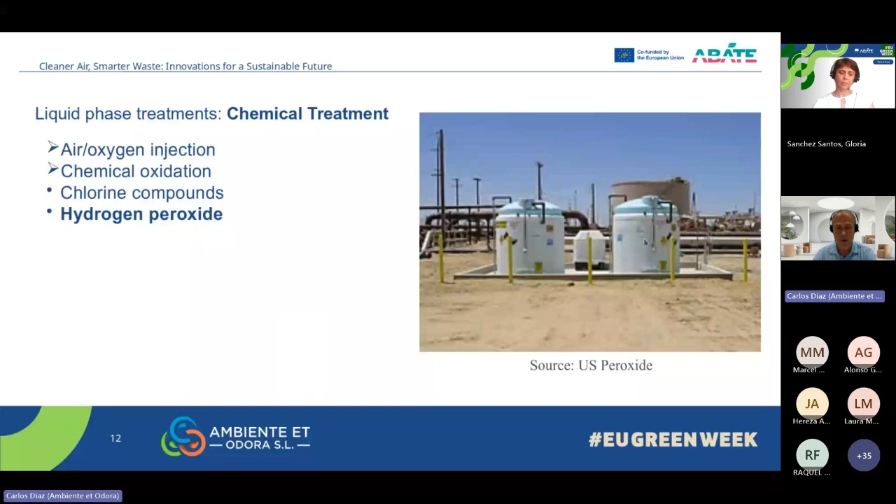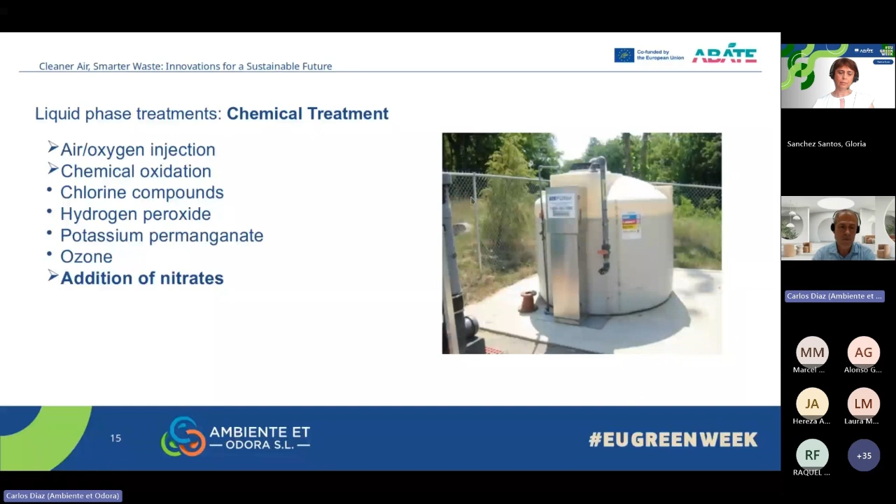Then you have chemical oxidations - for example, using chlorine compounds, you oxidize those volatile organic compounds, or hydrogen peroxide, potassium permanganate, ozone, which is typical. I try to include the sources when I get the pictures. Nitrates - this one I didn't include the source. Iron salts - this is from Webster. Most of them are good friends, I know most of them. And the pH adjustment - depending on the pH in a liquid, you may have a higher or lower emission of hydrogen sulfide, which is one of the typical indicators, not the only one.

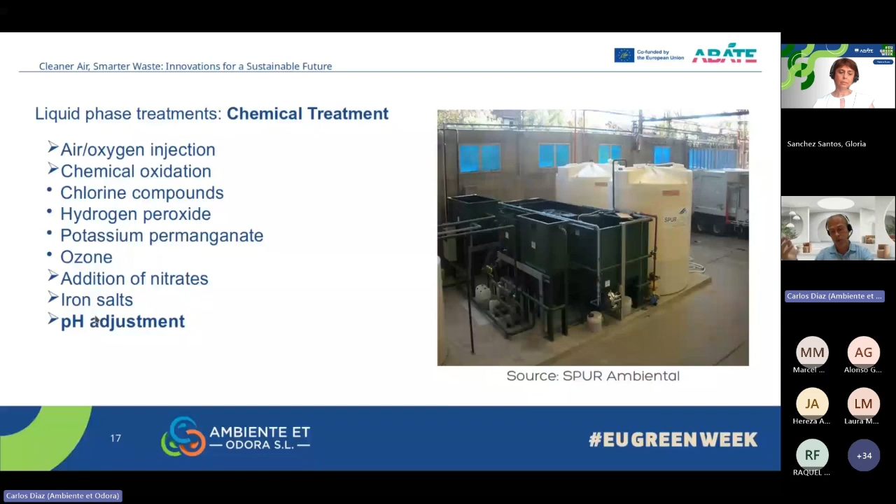Then in liquid phase treatments, you have the biological treatment, and there are three approaches. The first one is the recirculation of activated sludge. So you are in a wastewater treatment plant, and then you can recirculate the activated sludge and put it at the head of the system, at the beginning of the system, because there are nitrified effluents - remember, we use nitrates there.

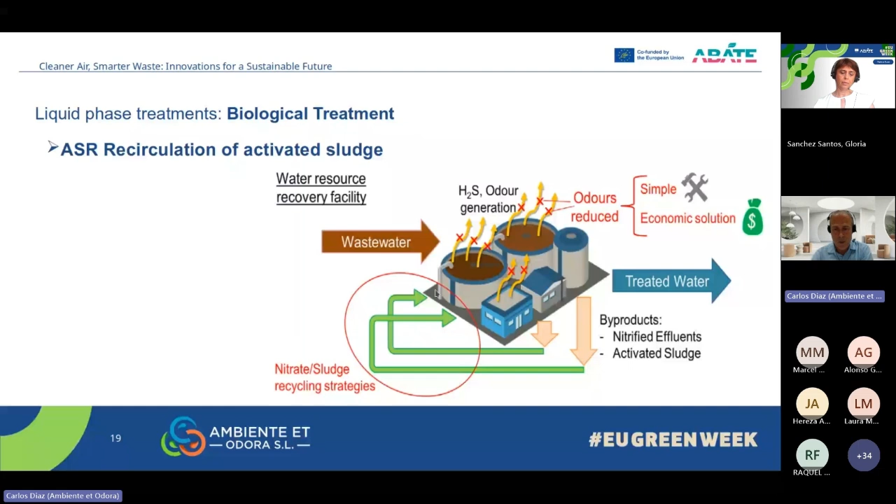Those will help improve odor emission in your wastewater treatment plant, in case you have it. Another approach is oxidized ammonium recirculation, where you get oxidized ammonium from, for example, centrate nitrification, or from the nitrification part, and then introduce it in the inlet.

So this is a very cheap way to reduce odor emission if you have a wastewater treatment plant with problems of odor complaints. It's not here, but sometimes people use enzymes for biological treatment. I didn't include it here because the publications I have found are not that positive.

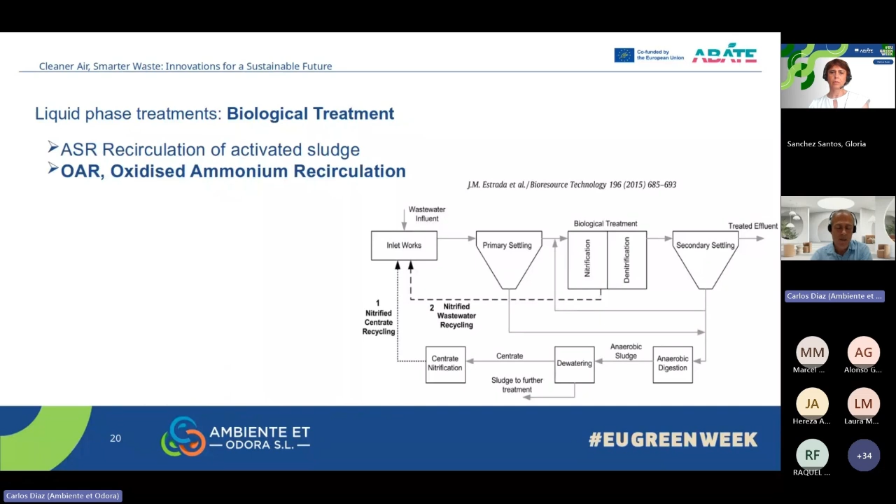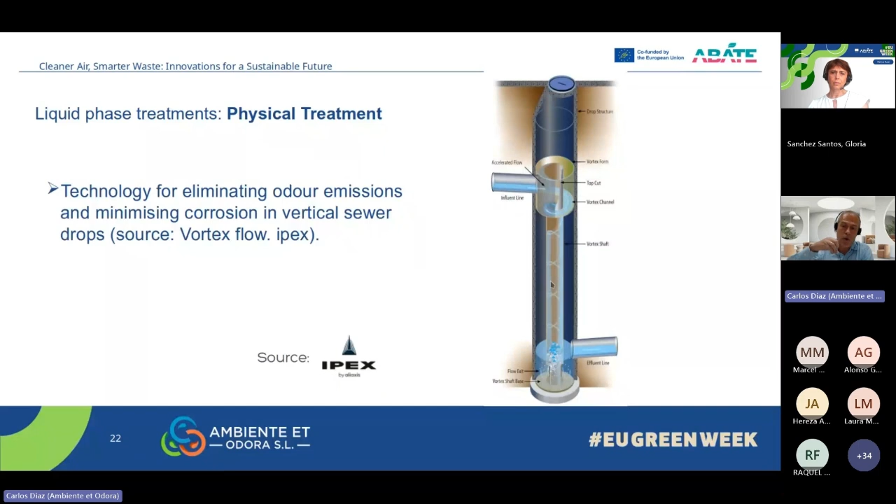Then you have physical treatment for water, and you have this technology, the vertical sewer drop. It's a vortex flow, used at a drop, where the water goes like this, so it gets aerated, and you decrease the turbulence which emits odors there.

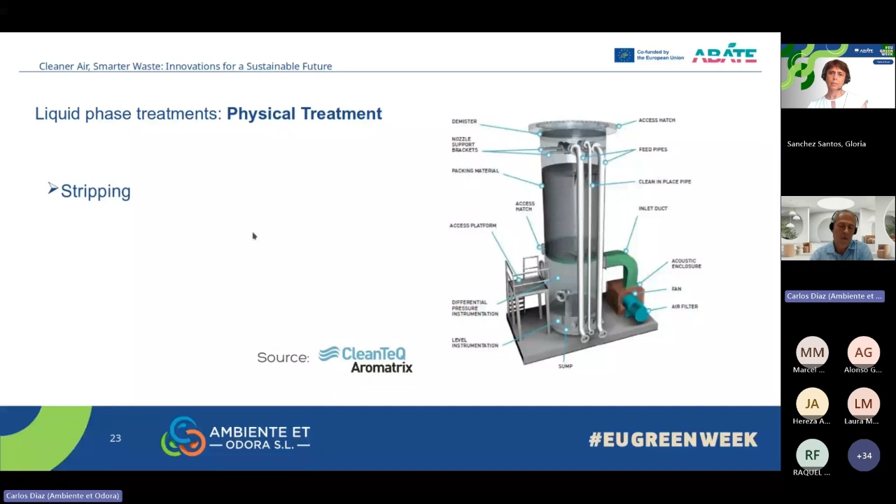You can use stripping, a typical way of dealing with this. It's done when you have high concentrations of volatile organic compounds in your water, and you can strip it out. This is another way to do it.

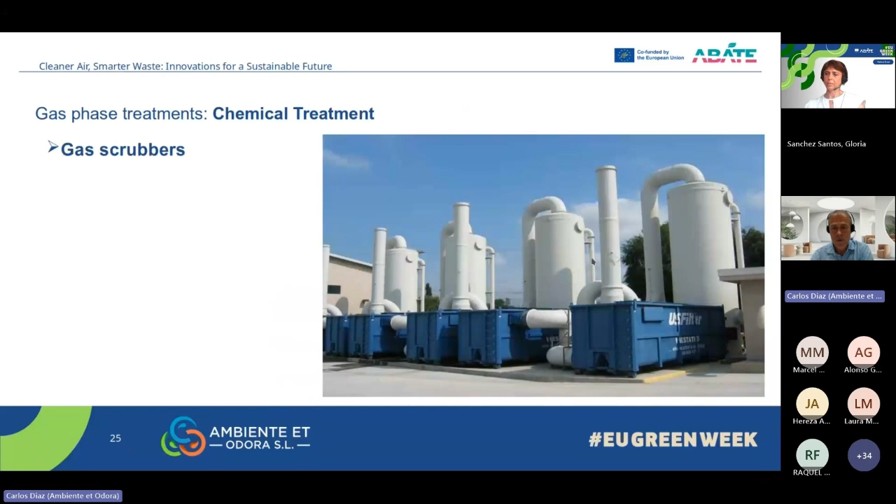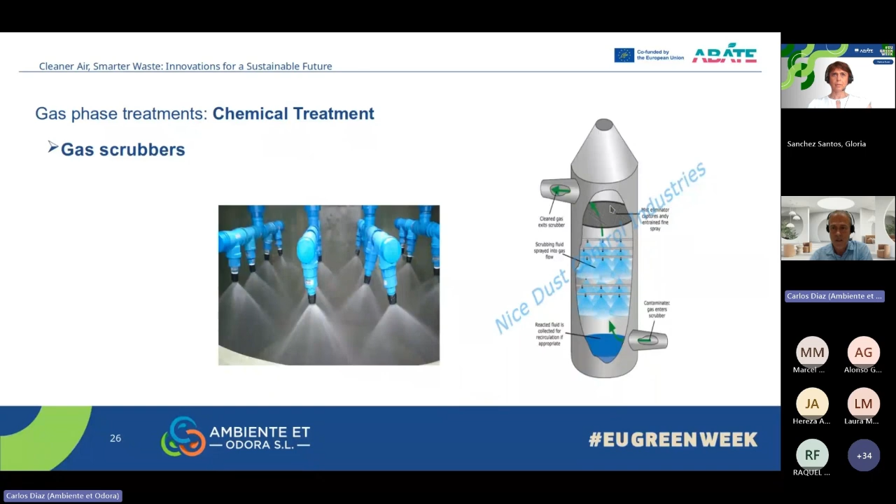For gas phase treatment, in chemical treatment, you have the typical gas scrubbers. This is a series of four scrubbers. A scrubber is just a shower with liquid, which can be water or other compounds, oxidizing compounds, or different types of compounds, to wash and scrub the volatile organic compounds from the airstream. The air comes through here, you wash this air, and then the air goes out cleaner.

Then for biological treatment, we have heard some technology before, so I will not go longer here. We have biofilters, open and closed, but we normally prefer closed. Biotrickling filters, which have been explained before, and bioscrubbers, which are other technologies.

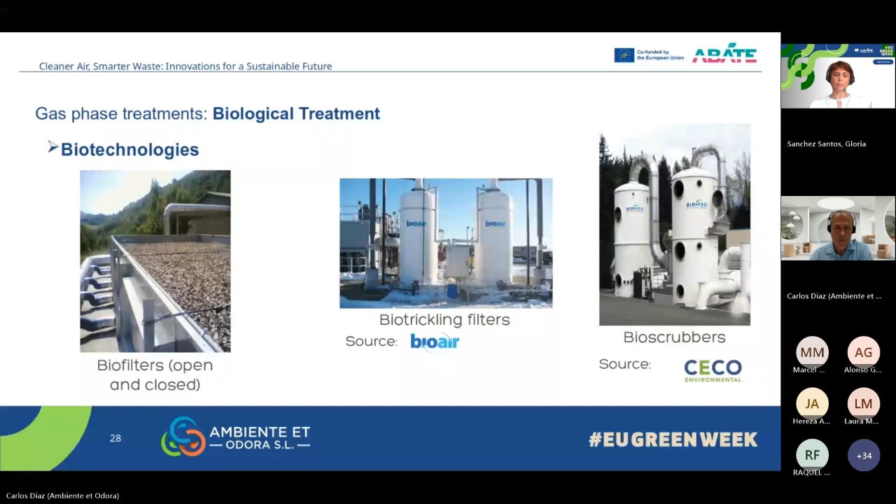These biological treatments look the same, but they are for pump stations or underground places where you have wastewater collectors, and you need small technologies, which could be biotechnologies as well. So here you have this one from BioRem. This is a pumping station in Canada, and there was no odor after that.

A biotrickling filter, and this one is also here. You see this, this is the top of a wastewater collector, and then you put it here. They sell this.

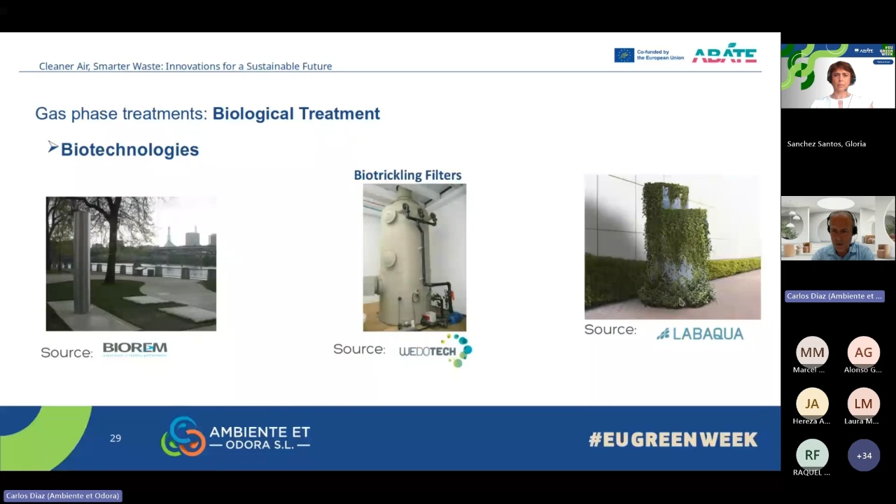For physical treatment, the typical ones are dry adsorption systems, and here you have different types. This one, for example, is for biomethane. It's made of, these are typical activated carbon. This is activated carbon impregnated with potassium permanganate, and this I think is zeolite, and another one I don't remember.

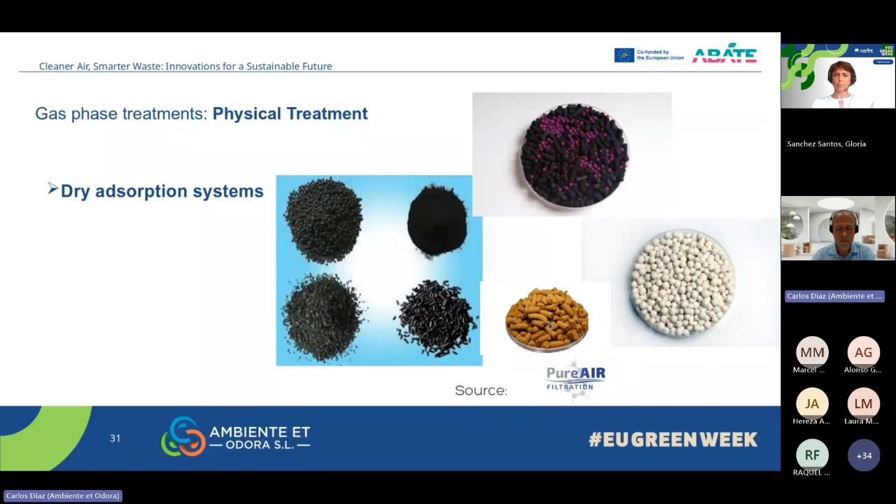And this is iron salts. They are made for biogas systems. So here you have one typical dry adsorption system with activated carbon.

Another physical treatment is thermal oxidation, which we have heard about before. You have direct oxidation, where your flame directly oxidizes the volatile organic compounds, which at temperatures over 700 degrees get oxidized to CO2 and water.

Then you have the recuperative type. This involves heat exchange, so you can capture this heat and produce water steam if you want.

Then you have the regenerative type, in which you use the heat from one chamber to heat up the other chamber, and for that you use a filling with ceramic tiles.

And then you have the catalytic type, in which you use a catalyzer to oxidize those volatile organic compounds, but at lower temperatures. This is the good thing about catalytic oxidizers: you spend less money using these, but they are more expensive than the other two. And finally, flares.

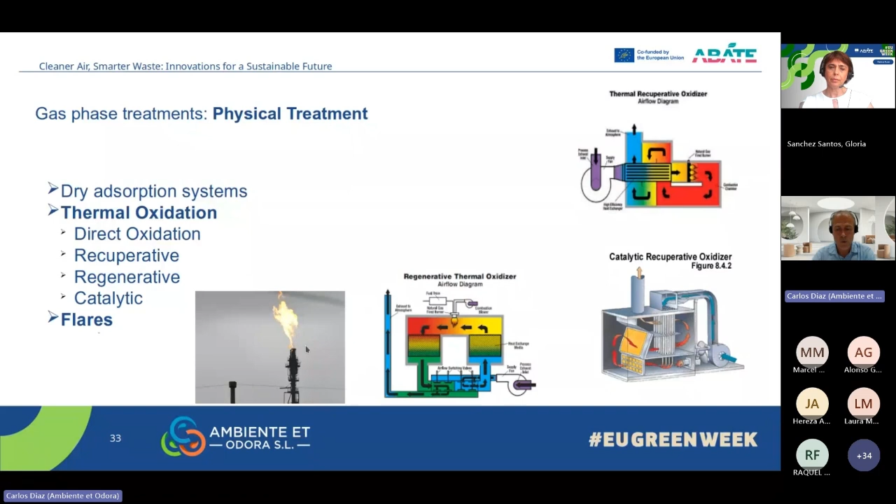And I will speak a little bit about rotoconcentrators. There have been some talks about this, but I had to talk because I'm talking about odour control. Rotoconcentrators are much used for when you have industries with a high concentration of volatile organic compounds like

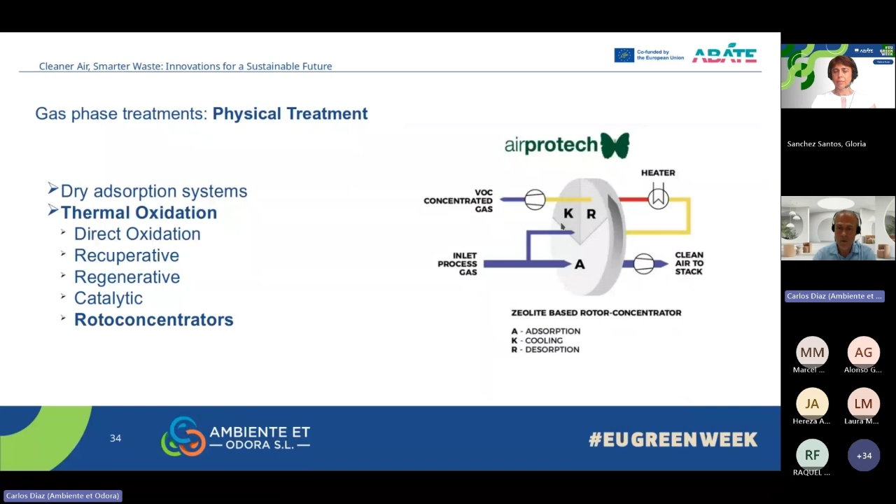paint or refineries or things like this, which have a very high concentration of volatile organic compounds. It's just a disk in which the VOCs get adsorbed with the zeolite, and this disk is spinning. When they get adsorbed, they get to this section in which they are heated up with a heater, and those compounds are desorbed. Once they're desorbed, the zeolite is clean again, and then it goes to a cooling phase, where it gets cooled, and again the system starts again.

So I included this picture from one of the partners of this consortium.

Then you have ozone that you can use. You could use it in the water phase, but you can also use ozone in the gas phase, which is typical. Cold plasma technologies - I didn't have time to put a picture here, but it's very much used. With cold plasma, it's just electricity that goes through here, and this electricity ionizes the gases and oxidizes them.

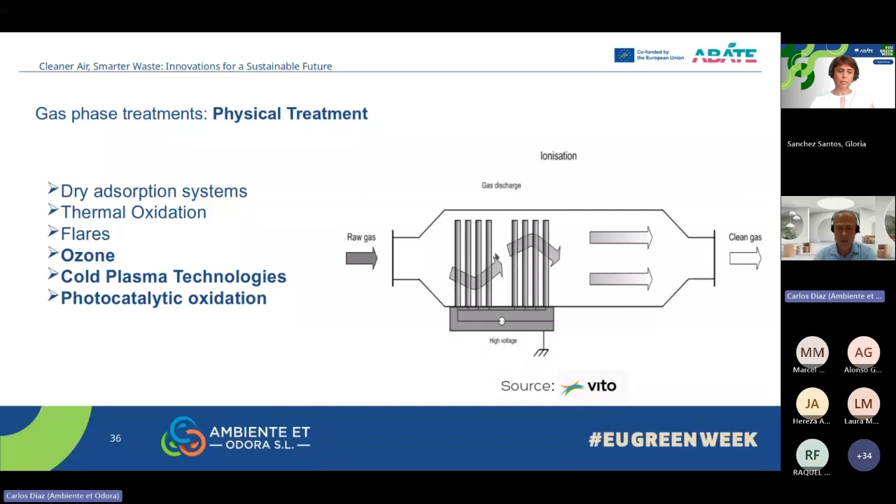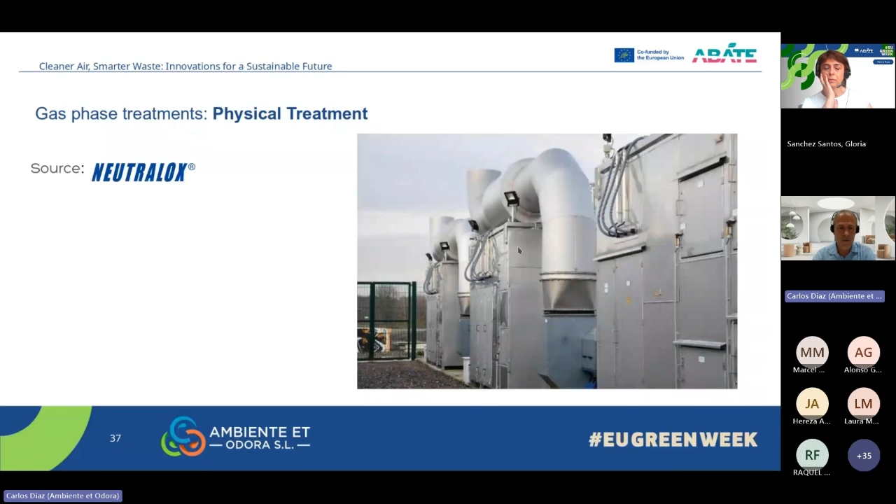And photocatalytic oxidation, which is this one, in which you use ultraviolet and sometimes a catalyzer like titanium dioxide, and you are able to, with very low energy consumption, get good abatement efficiency rates, so they work very well.

And this is another one. This is in Colombia. We were there a couple of months ago.

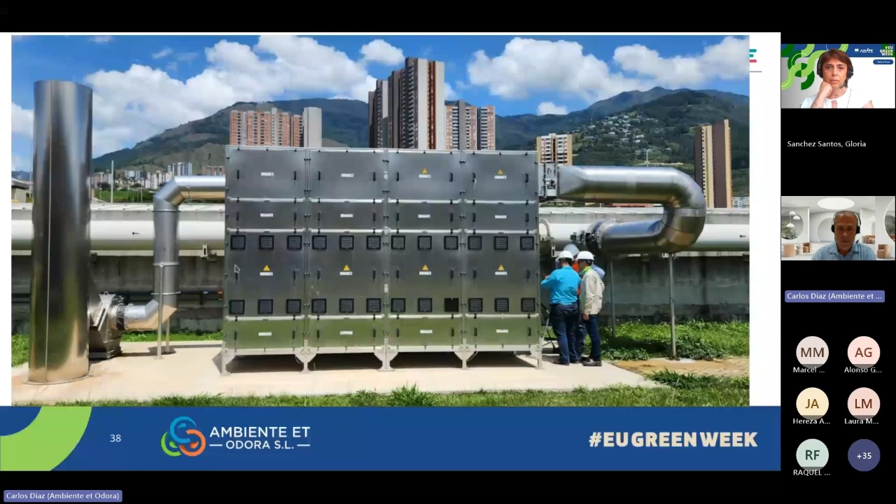All right, so which method should we use? So this is this typical graph in which we normally say - sorry, I forgot to put the reference, I'll include it next time, or ask me if you want to know the reference. It's a very old publication. But anyway, we didn't like this because it didn't talk about odour.

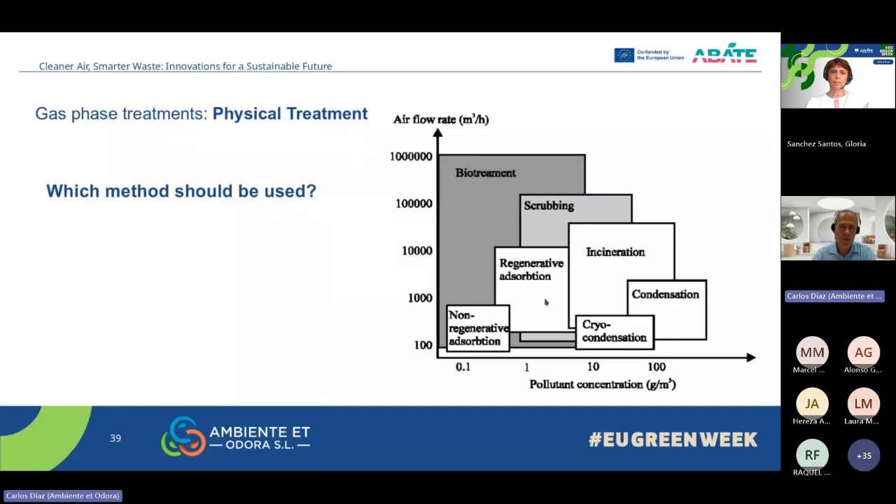So we went and did our own table. You see here biofiltering, biotrickling with minimum and maximum flows, concentration minimum and maximum, efficiencies minimum and maximum. And from where did we get this data?

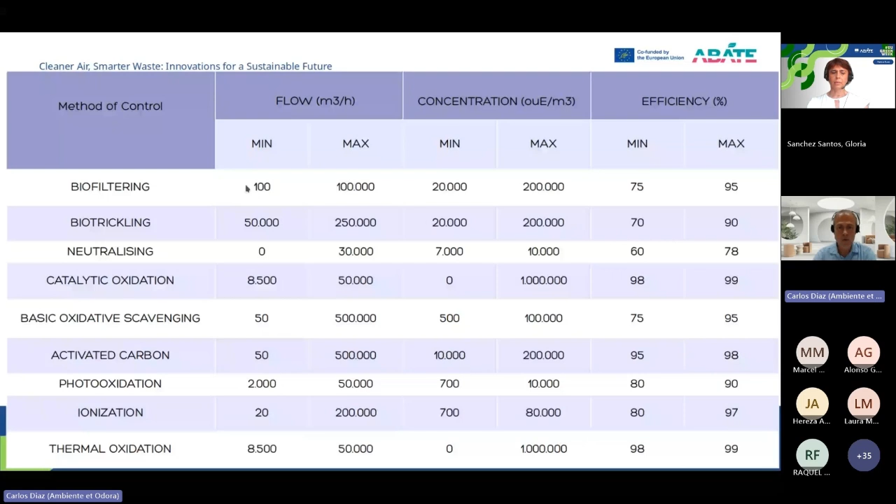We got this data from Vito. It's not here, the reference. From Vito - I see Ilse is around - we got different data related to flow and concentration and efficiency rates.

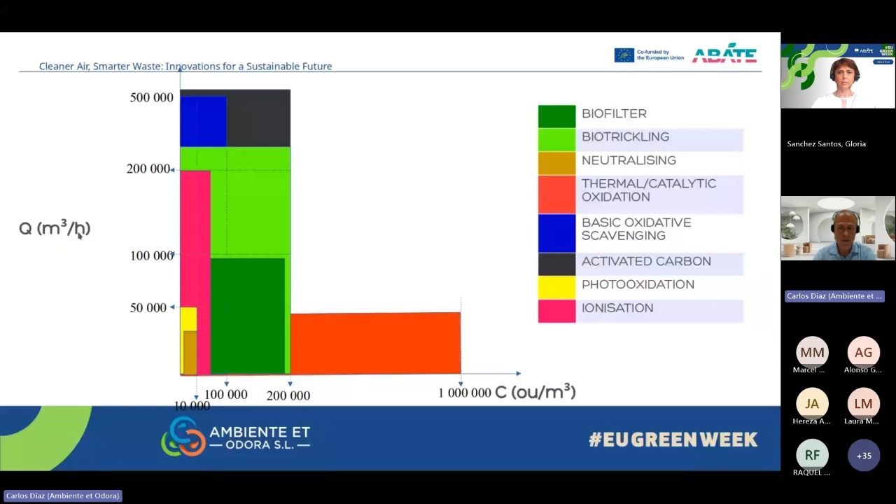And we produced this graph, which is different from the other one. The other one looks nicer, but for us, using that data from Vito is more related to odour. So these are some technologies, not all of them that I mentioned before, and here you have the efficiency rates, the maximum efficiency rates.

The Vito logo was here. Anyway, there are other types of technologies to abate odor.

The first one is elevated chimneys, for example, and you disperse the odor. This one is a tall chimney, and this is a way to increase your

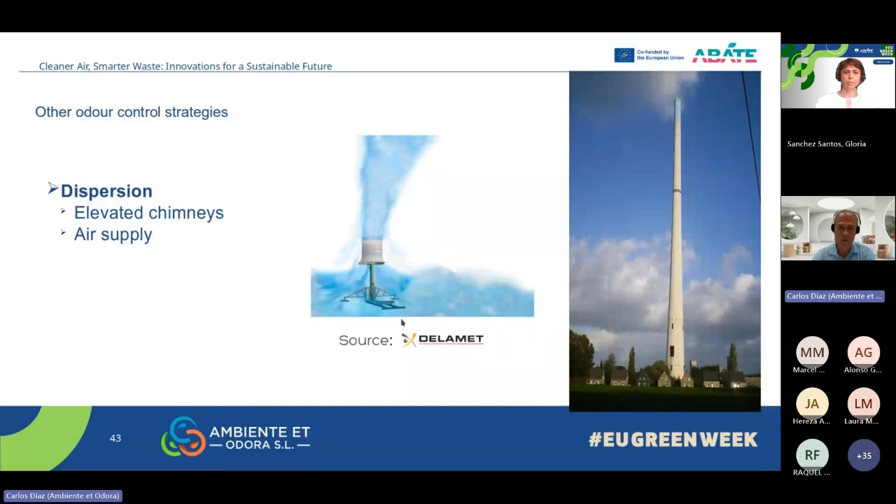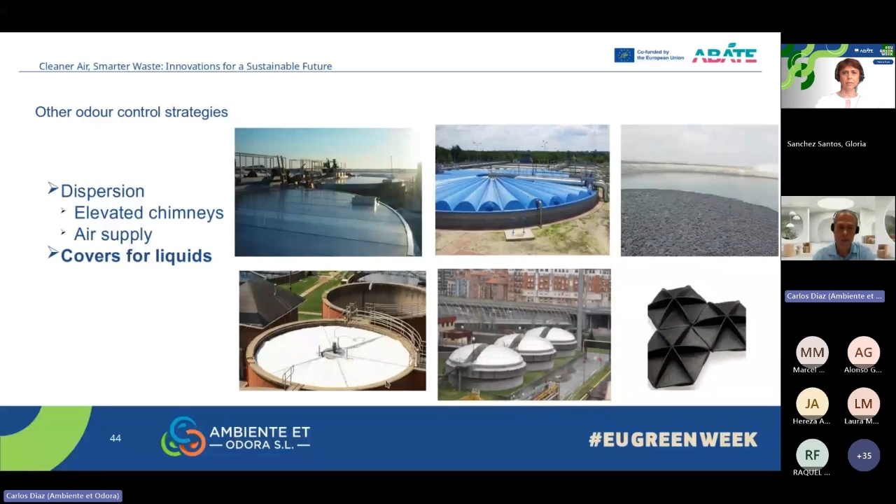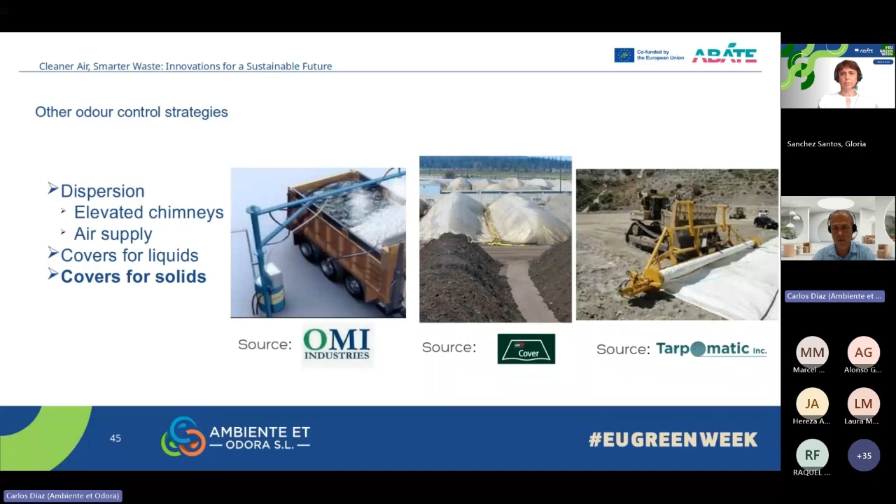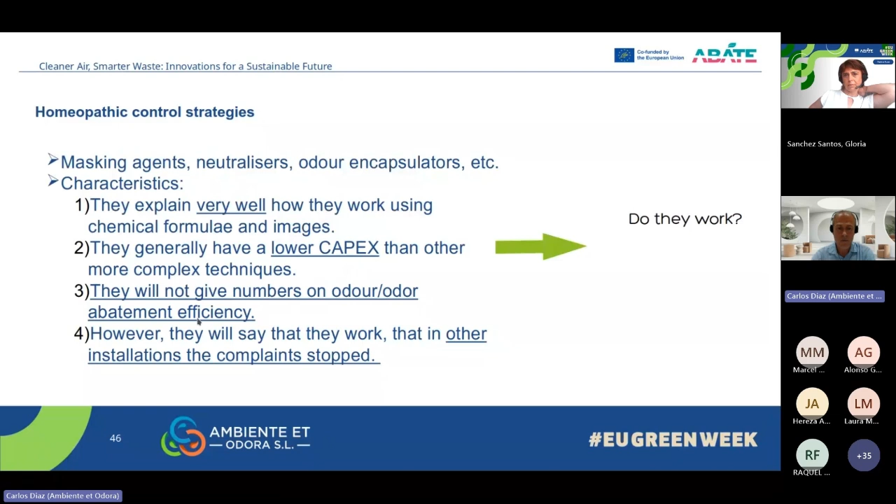And then you have masking agents, neutralizers, odor encapsulators, etc. They explain very well how they work. They generally have lower CapEx, but they will not give numbers on odor abatement efficiency. They just say that they work. So do they work? Maybe they do, maybe they don't. Who knows?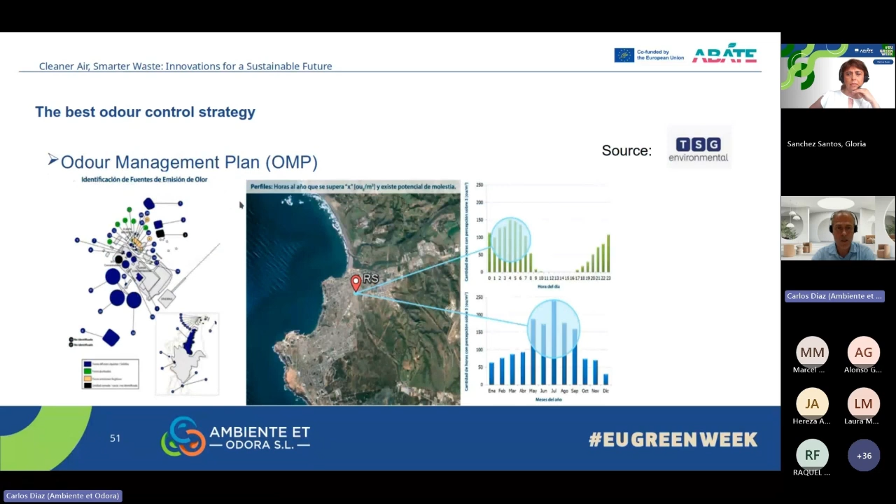But there are other strategies, like using meteorological data to control your odor emission, using diagnostic odor dispersion models, prognostic odor dispersion models, use of instrumental odor monitoring systems, and many others - for example, using an odor management plan. But the best odor control strategy for any plant is working on the process.

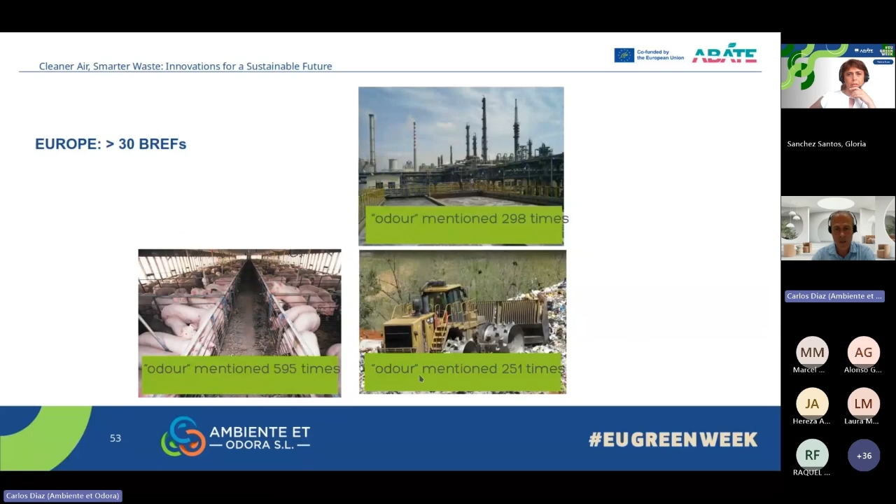If you want to know more, in Europe there are around 30 BAT reference documents related to different types of industries. And for example, in the farming or chemical industry or waste, you have the word odor mentioned a few hundred times with some mentions of odor abatement methods.

And thank you very much for your attention. If you have any doubt, I'll be waiting for your questions at the end of the session.